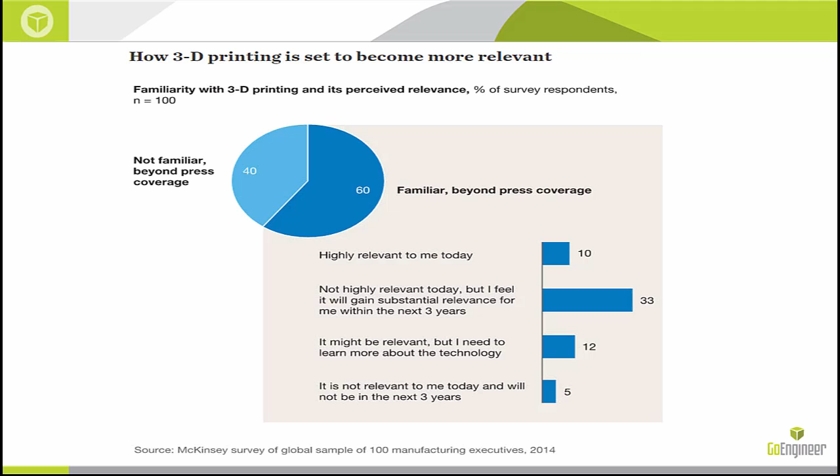So having said that, the outline for today is going to be: we'll talk a little bit about 3D printing adoption, who needs it, why do they need it, and what can they do with it.

Following that, we'll talk about design for additive manufacturing, specifically if you're considering using an additive manufacturing methodology compared to something else or a traditional method.

We will talk about optimization, what it means, and what topology optimization is. Once we define that, we can talk a little bit about constraints for additive manufacturing, which would be different from traditional manufacturing processes, and we can tie all these concepts together using a case study towards the end.

So, 3D printing adoption. It's important to note that 3D printing lets you make a lot more organic shapes compared to before, where a lot of the shapes were very non-organic.

Because of this, the main industries that have taken to 3D printing are defense and healthcare. Healthcare already had to make a lot of organic shapes, and hence their processes were very expensive, so it became cost comparable to switch to an additive manufacturing process.

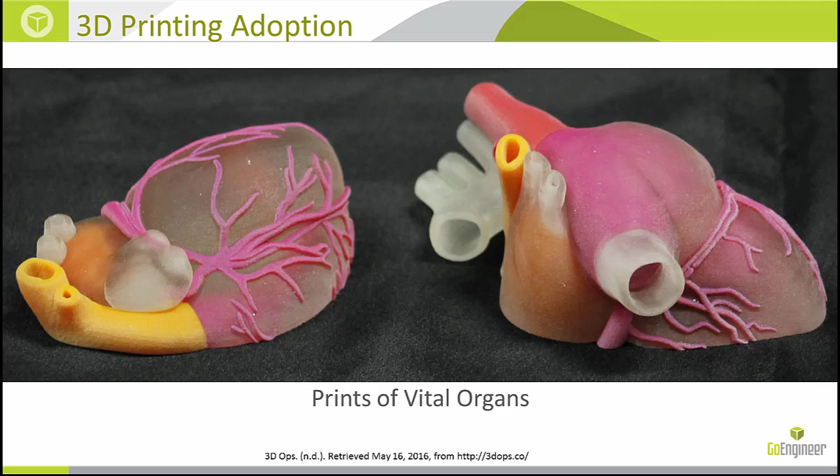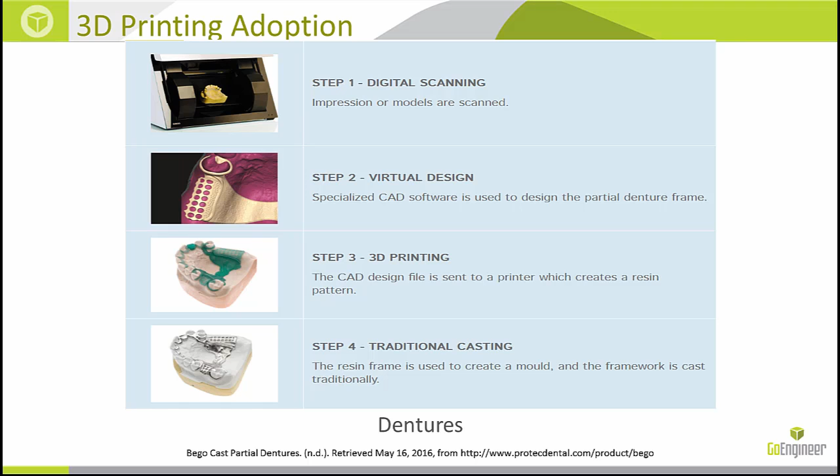Another place is dentures, where expensive casting or molding techniques were replaced with more traditional, organic shapes that would conform to each person's teeth structure. And finally we also have implants. Each person's body shape is slightly different, and if you want a good fit for each person, here is a hip implant designed for a specific person. Biomedical parts are tough to manufacture. They have to be organic in shape, you can't replace them, and hence it made sense here.

Taking the same concept to other industries, we've seen how, because of manufacturing constraints, a lot of shapes today are very non-organic. If you want drastic changes in design, going away from hoping for a 5% decrease in mass to a 30-40% reduction in mass, then this is a process that needs to be taken into account for end-use manufacturing. Another example is the aerospace industry. There are companies now designing not for minimum cost, but maximum allowable mass, and when mass is such an important criteria, it really does pay to go to an additive manufacturing process.

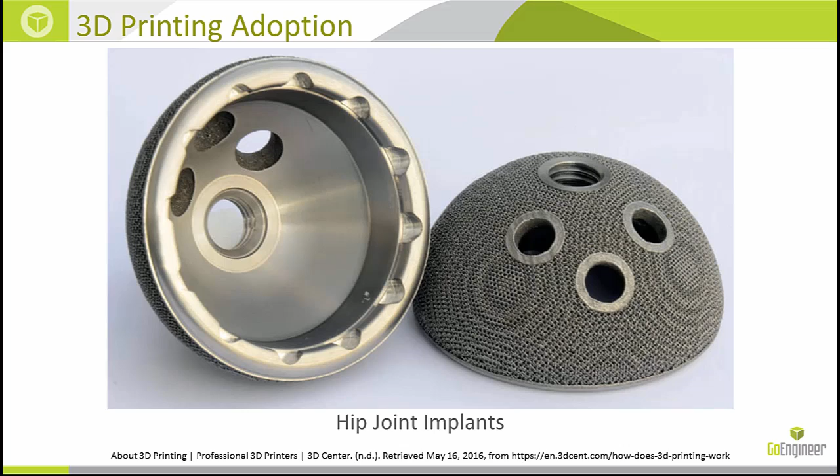So, having said that, let's talk a little bit about design for additive manufacturing before we go into optimization. Complexity has no additional cost. However complex your part is, if you're manufacturing it through an additive process, the complexity of the part does not take additional material, nor does it take additional time to manufacture. There are of course some things you need to take into consideration, but for the most part, there are no problems in terms of how complex the part is, as long as it can be printed.

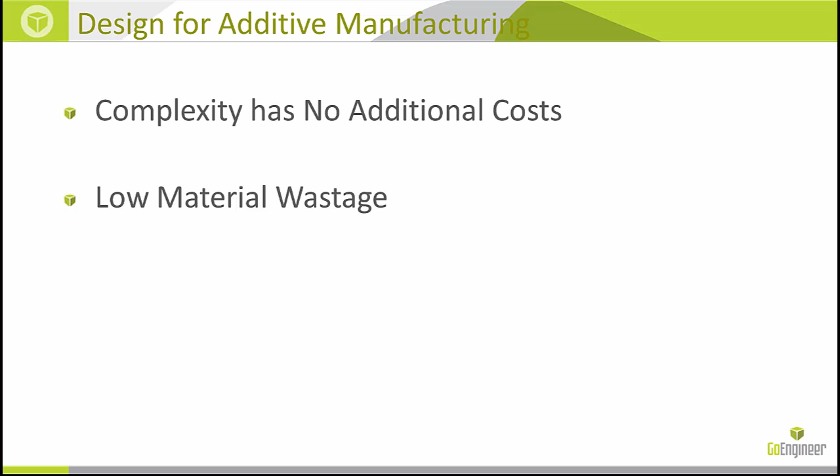The other benefit is low material wastage. There's a buy-to-fly ratio, and in some extreme cases you could need as much as 10 times the material compared to the weight of the final part when using traditional manufacturing processes for complex components. That's where an additive manufacturing process is a lot more beneficial, where not only are you using less material for your designs, you also need less material for the process itself, because the material you waste cutting stuff out is not as much.

And finally, support material considerations. This is a new thing in additive manufacturing that's different from traditional manufacturing processes, because an additive manufacturing process needs support material, which you would not need otherwise in a traditional process. So that's one thing we need to take into account, and we'll talk a little more about this soon.

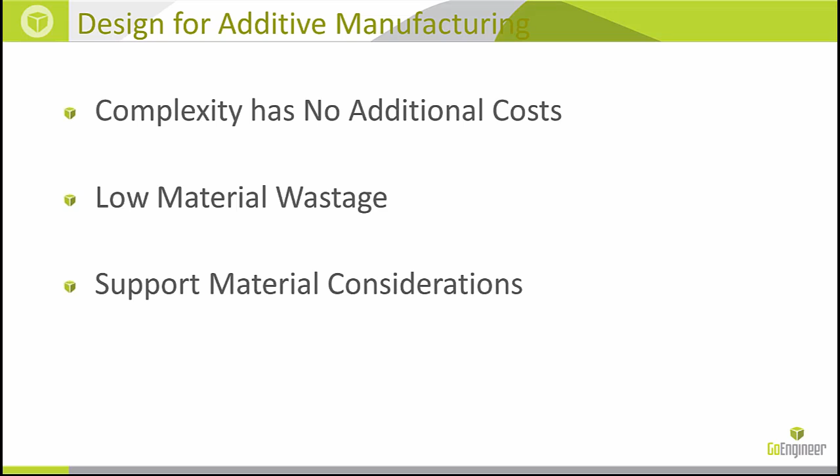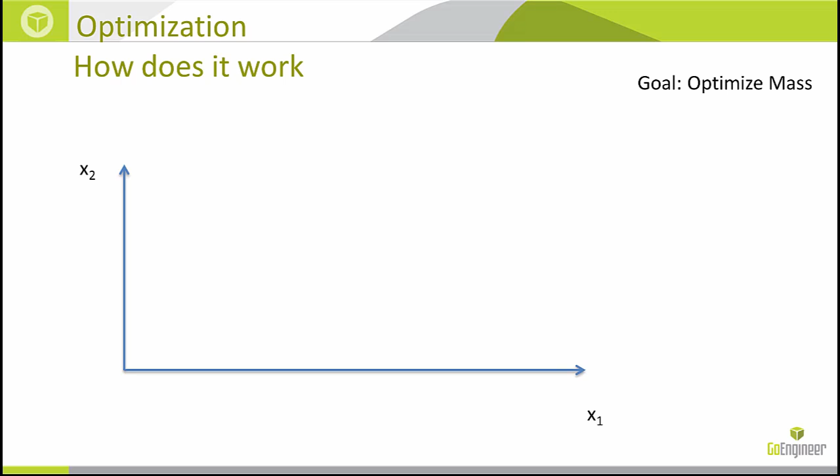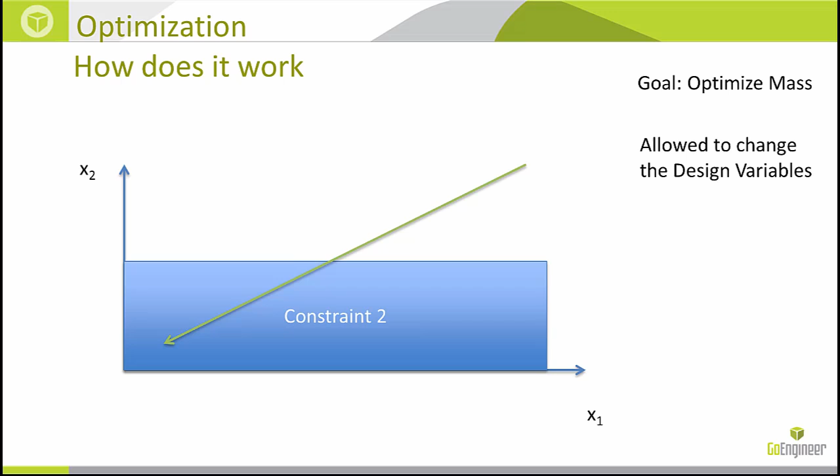x1 and x2, and your goal is to optimize the mass of your design by changing these two variables. In a very theoretical sense, if you decrease both those variables down all the way to 0, then let's say the mass goes down to 0. However, you have some constraints. You don't want the stress to be above a certain level, you don't want too much displacement, you don't want the part to bend too much or deform too much. Hence you get these constraints that prevent the mass from going down to its theoretical minimum. But that's when you get an optimization point which conforms to all the constraints, but still is the least amount of mass possible.

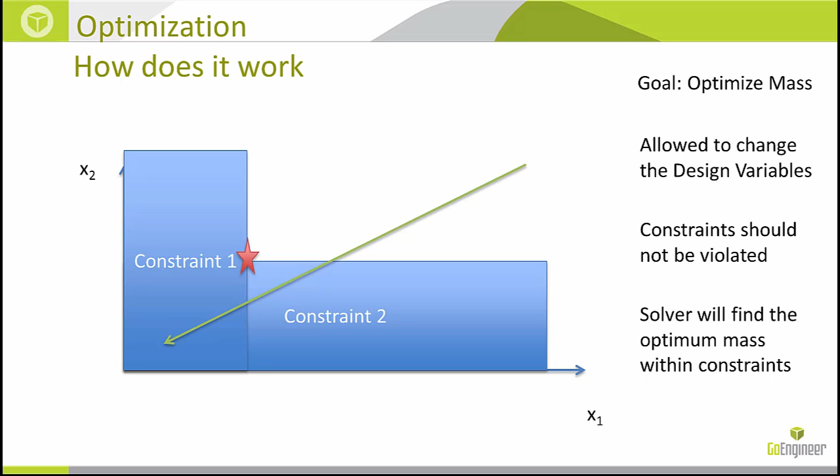So talking about constraints, now we can look at specific constraints for the additive manufacturing process. There are different technologies out there, and different technologies might have slightly different constraints, but these are some minimal things you need to take into account when using an additive manufacturing process. For example, the maximum size of the printer bed. This seems like a no-brainer, but given whatever the maximum size is, your part cannot be bigger than that. This is one of the reasons more expensive printers have a bigger print bed volume as well.

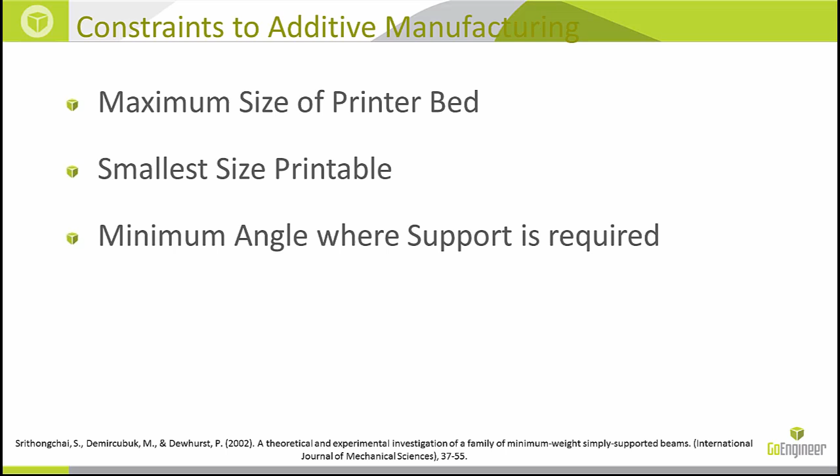You also have a smaller size that can be printed, which is a minimum size allowable. There is a minimum angle where support is required. Again, different processes have different requirements, but some additive manufacturing processes do not use any support, and they prefer a minimum angle of 45 degrees. There could be other processes where support material is always used below a part, for example the PolyJet process that Stratasys does. So these are additional things that need to be taken into account.

Clearance between separate regions and minimum contour thickness - I'd like to pull up this picture real quick to talk about that. If you have two different struts, especially with an electron beam selective melting process, there is a minimum gap needed between different separate regions. Also, the minimum contour thickness is the minimum thickness a particular region can have, which needs to be accounted for as well. Layer thickness and similar parameters can also be optimized to ensure the best quality of your part.

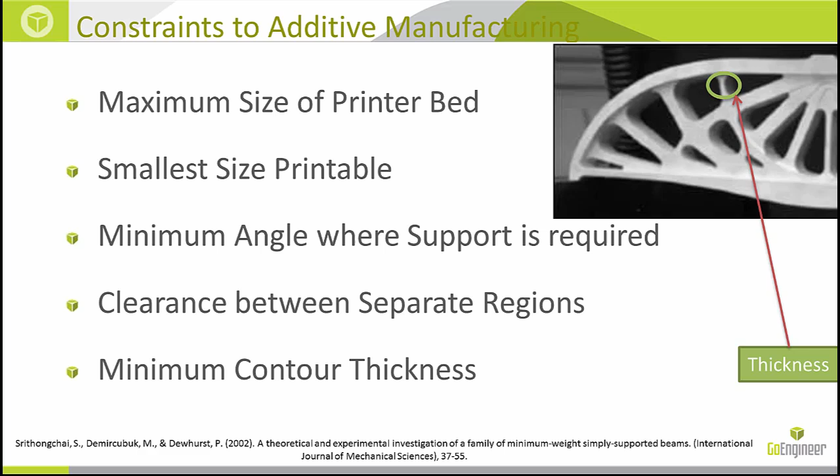Let's talk about the different types of optimization. Something like SolidWorks simulation can do dimensional optimization, where it looks at specific parts and dimensions, like fillet radius. In this case, a heat sink is optimized by looking at the source of the heat, going from an initial design to a final design where the maximum temperature should not exceed a certain expected level, while trying to get the least amount of mass possible.

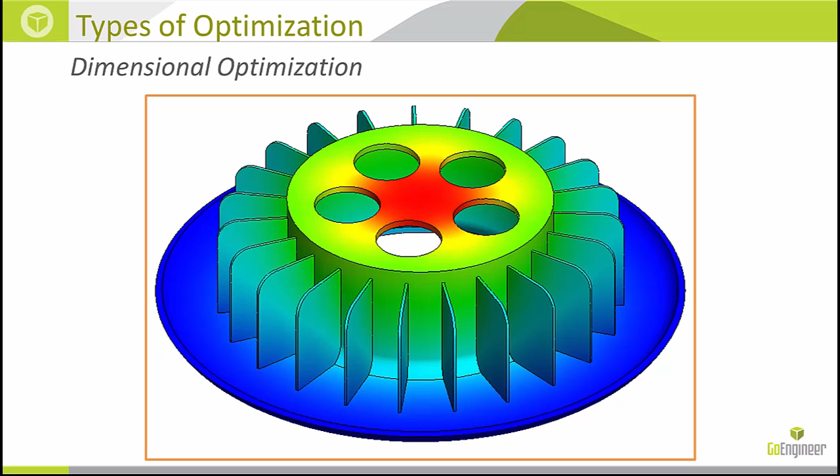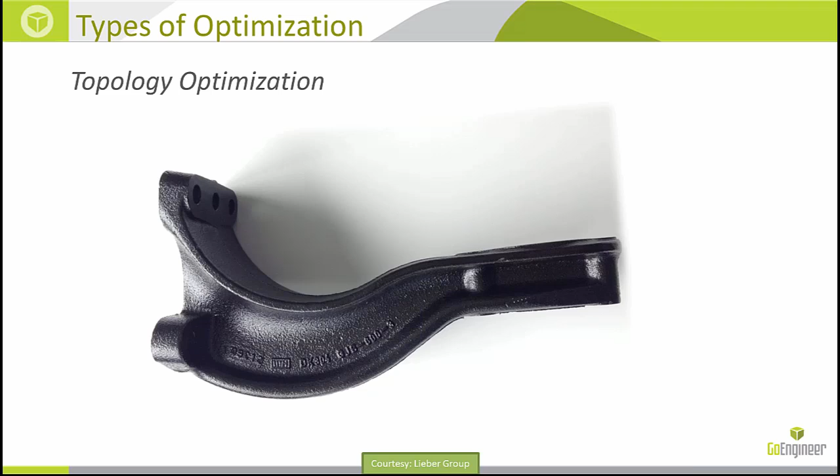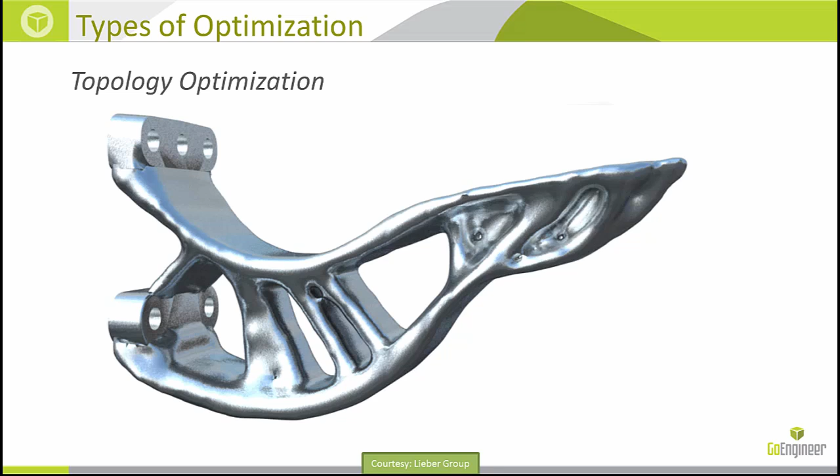There's also topology optimization. Something like solidThinking Inspire does topology optimization, starting with an initial shape. This is an air spring carrier by Lieber Group, with weight initially at about 8 kilograms. Using Inspire and topology optimization, this weight was reduced to about 4 kilograms. You can see that the main regions where this design interfaces with other components, like those holes on the left, are still held, while the rest of the design is optimized to give a better transition from the region of the load to the region of the restraints, while decreasing mass as much as possible.

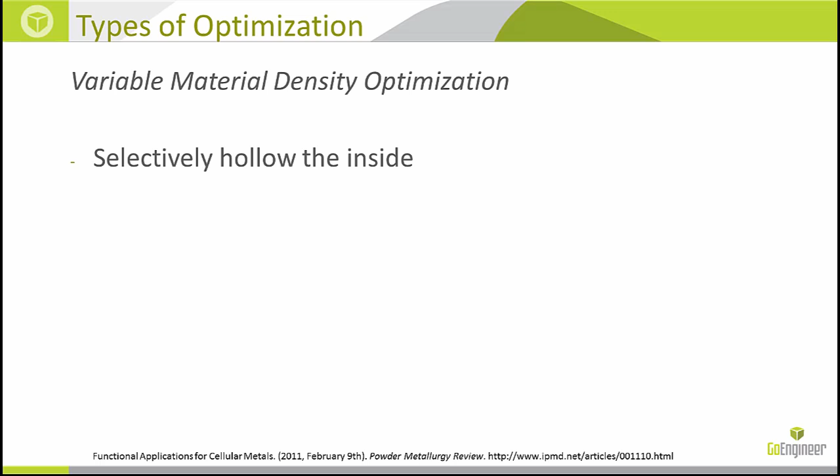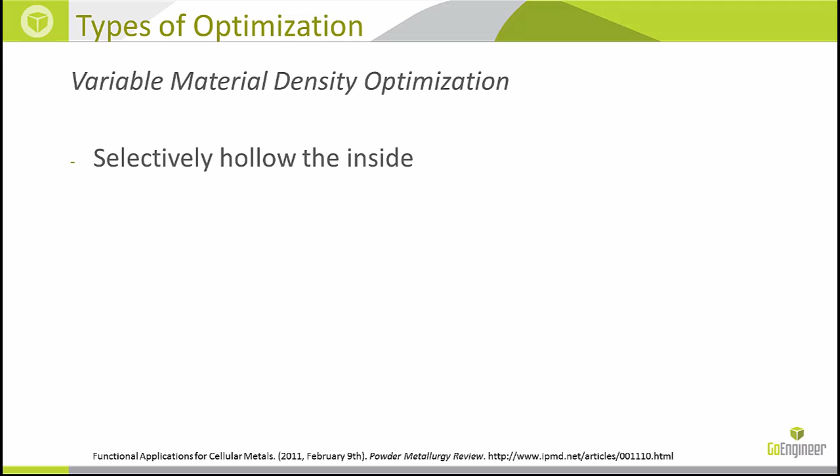The third type of optimization is a lattice-based optimization called variable material density, where material density is no longer binary - you either have material or not. Now you can have a lattice structure of various relative density such that your designs are selectively hollow on the inside. This is very useful in unique applications like compressive load applications - for example, a car bumper can have a variable lattice structure inside so there's space for it to compress to, allowing it to take more load for a given amount of deformation, creating better impact applications.

Thermal insulation is another place where, because of the air filled on the inside, the part overall acts as a better insulator.

On the subject of variable material density, this picture shows an open cell metal foam, made with a different manufacturing process. It's important to note that an open cell metal foam has pockets of air on the inside, open on all sides. As we discussed with support materials earlier, if this part was additively manufactured, it would be filled with support material initially, which could be removed using a soluble fluid. I bring this up because there's also a closed cell metal foam, which you would not be able to manufacture through a 3D printer, because the air pockets closed by metal would be filled with support material with no way to remove it, since those regions are inaccessible.

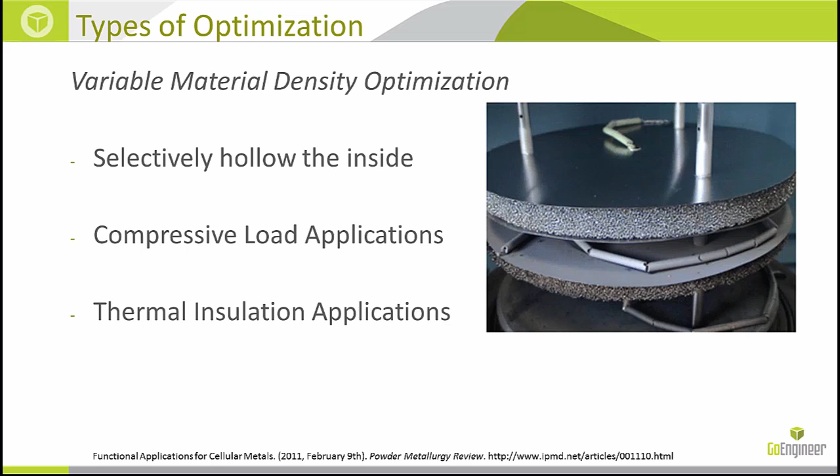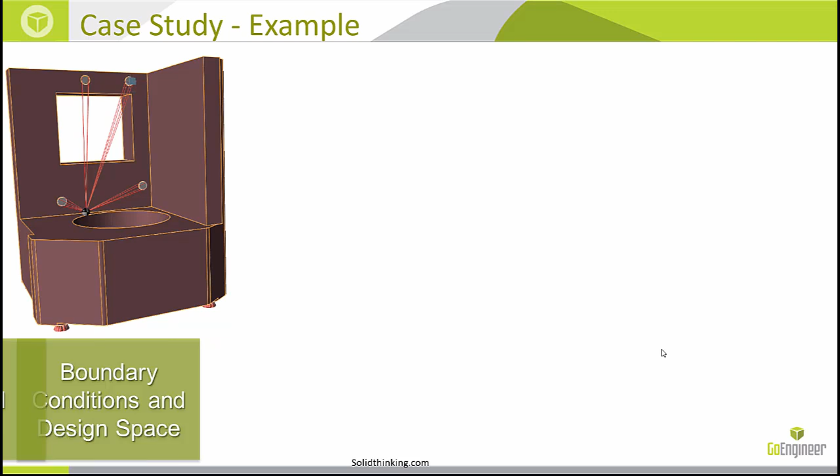Let's tie this all together with an example. Here is a case study with 4 fixtures at the bottom, and a weight held by 4 holes on top. solidThinking Inspire was used again, where whatever is in red is called the design space, which can be shaped and material removed from that region. A topology optimized process is used, and as you can see, a lot of material has been removed to arrive at this shape.